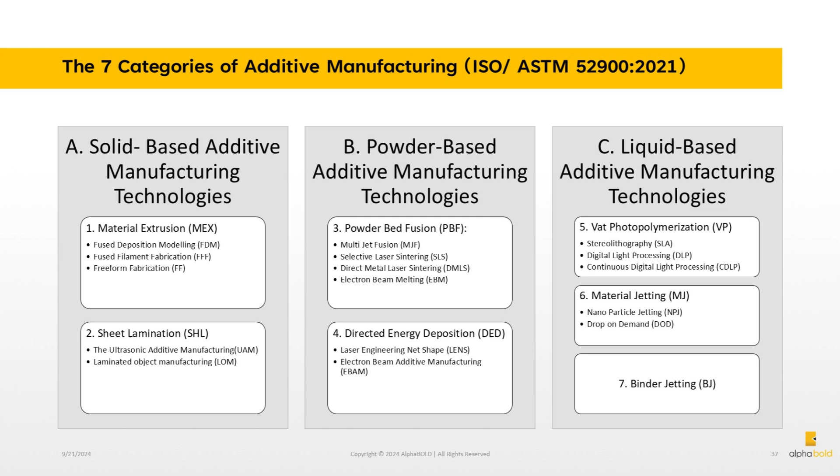5. Vat photopolymerization, VP: stereolithography (SLA), digital light processing (DLP), continuous digital light processing (CDLP). 6. Material jetting, MJ: nanoparticle jetting (NPJ), drop-on-demand (DOD). 7. Binder jetting, BJ.

Solid-based additive manufacturing technologies. 1. Material extrusion, MEX: fused deposition modeling (FDM), fused filament fabrication (FFF), freeform fabrication (FF).

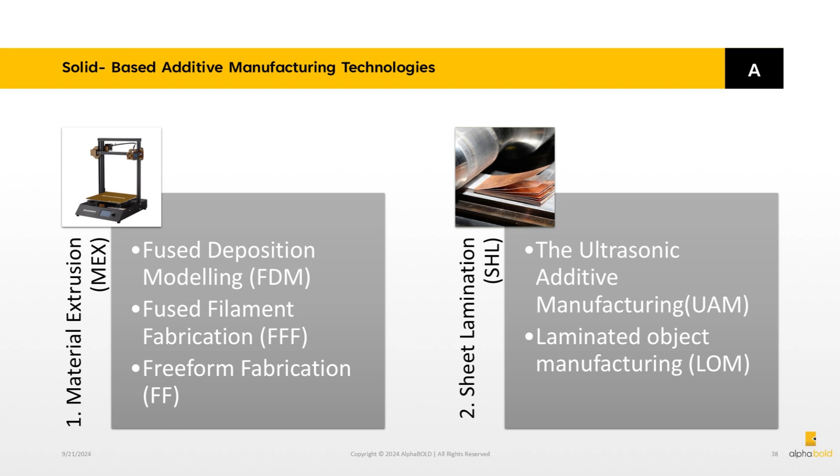2. Sheet lamination, SHL: ultrasonic additive manufacturing (UAM), laminated object manufacturing (LOM). Material extrusion, MEX.

Continuous flow: imagine a hot glue gun, but instead of flat lines, it builds intricate shapes layer by layer using a melted plastic filament. Precise deposition follows.

A heated nozzle carefully deposits molten material, creating each layer on top of the previous one. Dynamic movement: the nozzle moves horizontally, while the platform moves vertically, enabling complex 3D structures.

Accessibility: affordable and user-friendly, material extrusion is popular in hobbyist and even professional settings. Diverse materials: from common plastics like ABS and PLA to exotic options, a wide range of materials is available for

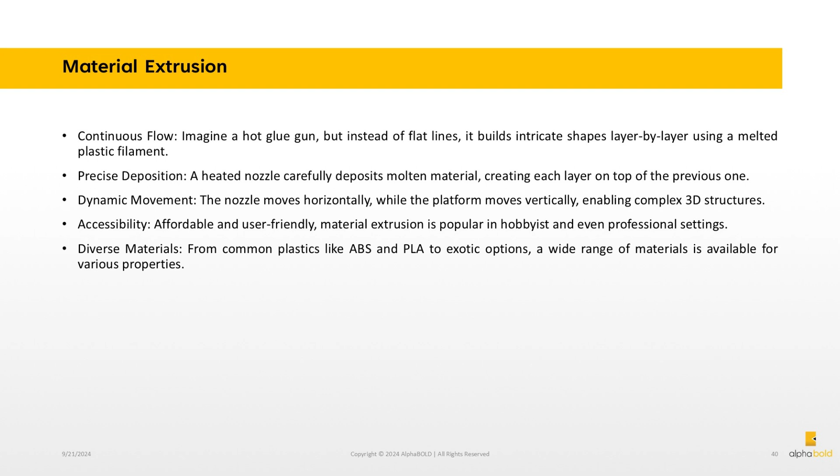various properties. Fused deposition modeling, FDM. FDM is a material extrusion process where material is heated and deposited layer by layer. It is commonly used in inexpensive 3D printers and requires controlling several factors for good quality.

Unlike other 3D printing processes, material is added continuously through a nozzle under constant pressure. Material layers can be bonded by temperature or chemical agents. Material is typically added in spool form.

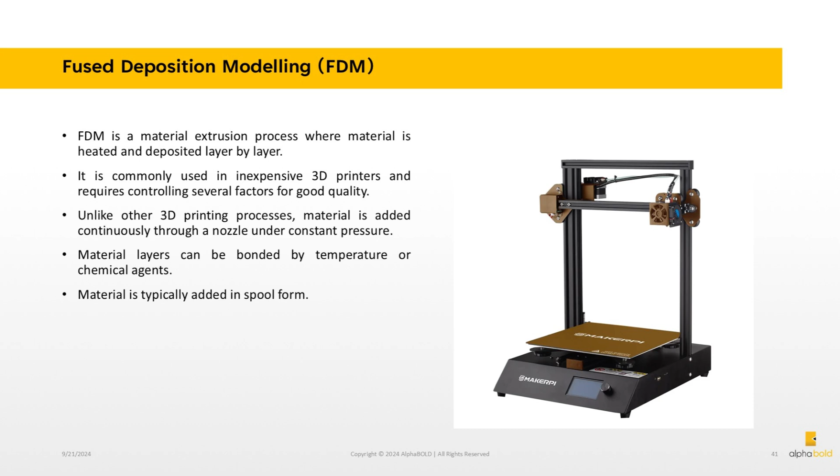Fused filament fabrication, FFF, also known as fused deposition modeling, FDM, is a popular 3D printing process using continuous thermoplastic filament. FFF printers melt filament in a heated extruder head, depositing layers to build the desired object under computer control.

Various materials like ABS, PLA, and nylon can be used for FFF printing, offering versatility in applications.

The process involves software processing of STL files, nozzle movement to deposit layers, and thermal control for proper material bonding. FFF printers typically feature a flat bed, gantry system, and stepper motors, with some using 3D printed components and polar

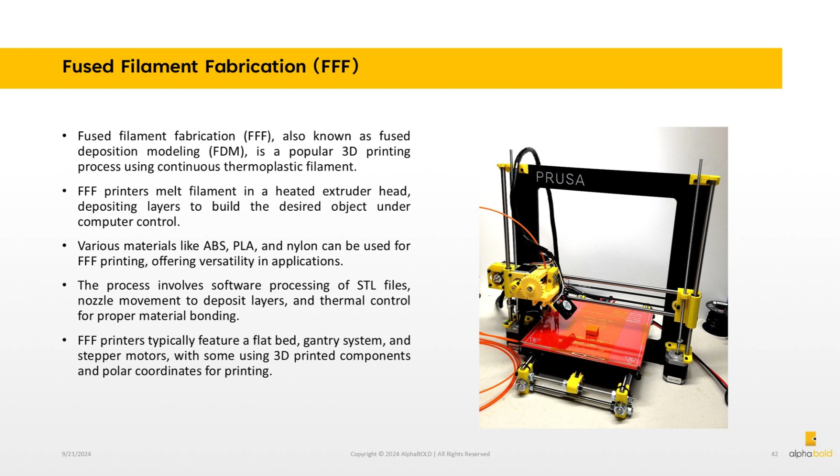coordinates for printing. Freeform fabrication, also known as solid freeform fabrication (SFF), encompasses various technologies that enable the direct creation of complex solid objects from computer models without the need for part-specific tooling or extensive human intervention.

It also goes by other names like rapid prototyping, rapid manufacturing, and solid freeform fabrication. The process allows for the creation of complex shapes and structures layer by layer. Unlike traditional manufacturing methods, FF does not require molds or tooling, offering greater design freedom and flexibility.

FF techniques include selective laser sintering (SLS), stereolithography (SLA), and digital light processing (DLP), among others. FF is used in various industries such as aerospace, automotive, healthcare, and consumer goods for prototyping, customization, and low-volume production.

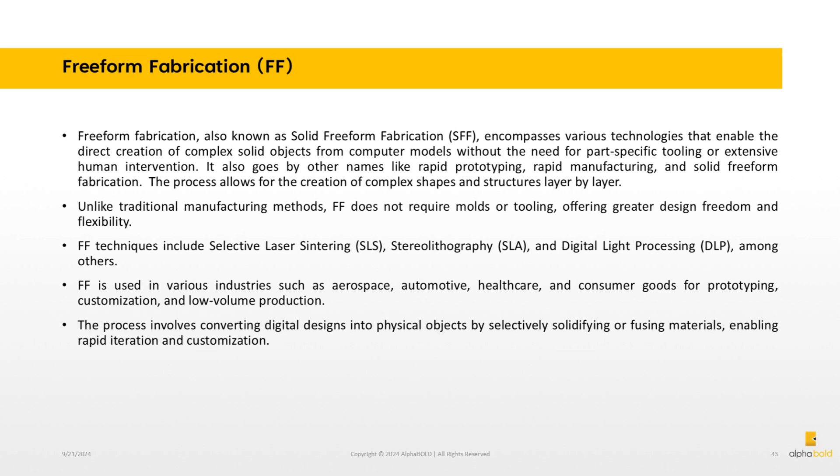The process involves converting digital designs into physical objects by selectively solidifying or fusing materials, enabling rapid iteration and customization.

Steps: material preparation. The filament, typically made of plastic, ABS, PLA, etc., is loaded onto a spool and fed into the printer. Extrusion: the filament is heated and softened within the extruder nozzle.

Deposition: the molten material is deposited onto the build platform, following a computer-generated path. Solidification: the extruded material cools and solidifies, bonding to the previous layer. Layer by layer: the process repeats, building the object layer by layer until completion.

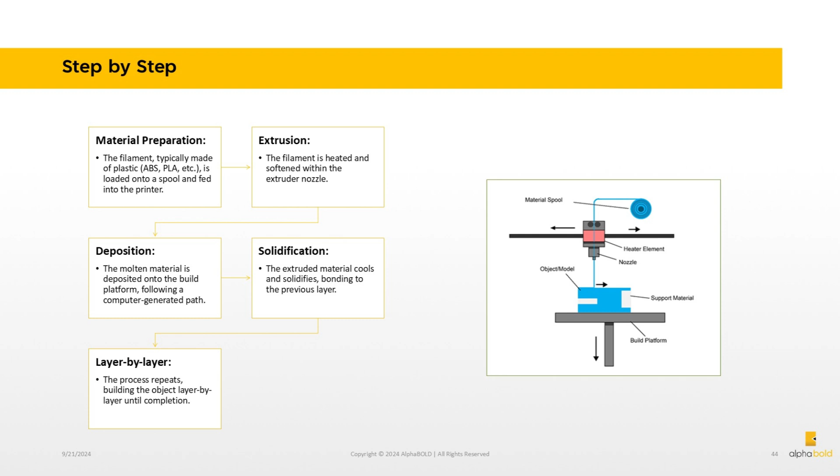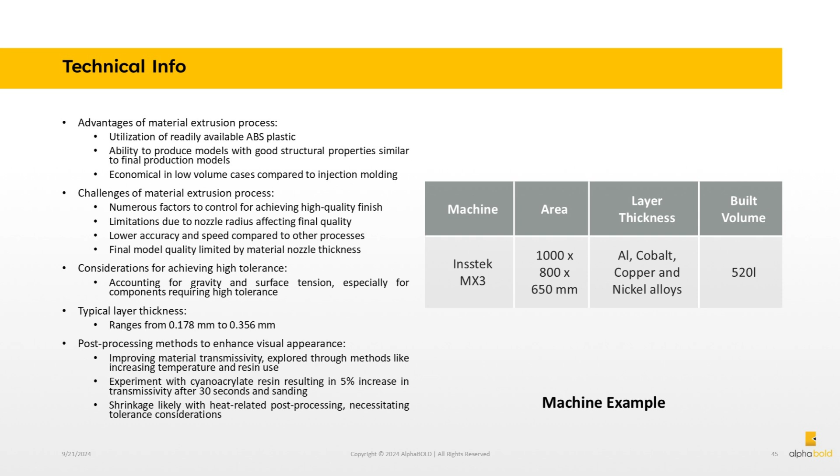Machine example: Insstek MX3. Build area 1000 by 800 by 650 mm. Layer thickness suitable for Al, cobalt, copper, and nickel alloys. Build volume 520 L.

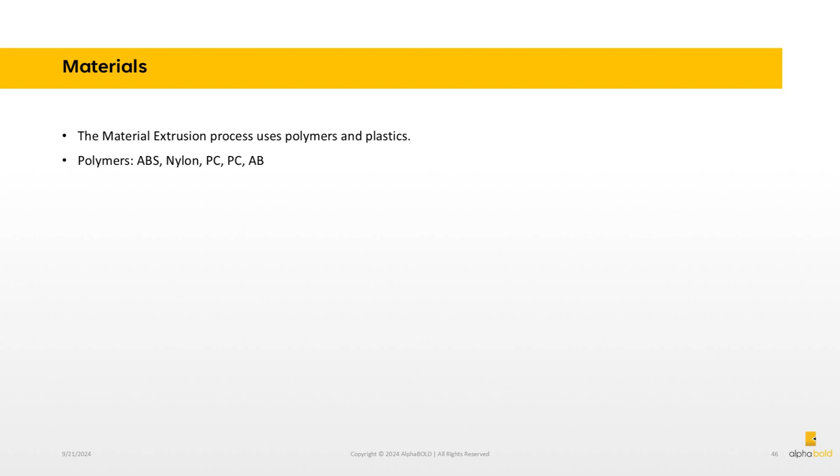Materials: the material extrusion process uses polymers and plastics, such as ABS, nylon, PC, and ABS blends.

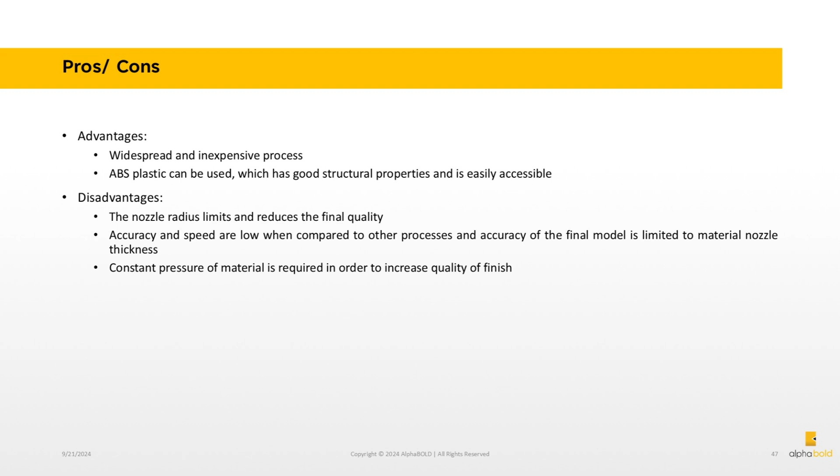Disadvantages: the nozzle radius limits and reduces the final quality. Accuracy and speed are low compared to other processes, and the accuracy of the final model is limited to material nozzle thickness. Constant pressure of material is required to increase quality of finish. Sheet lamination, SHL.

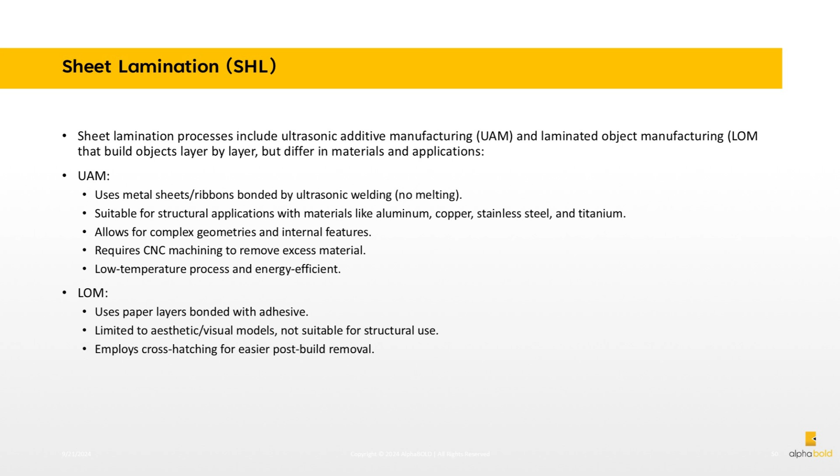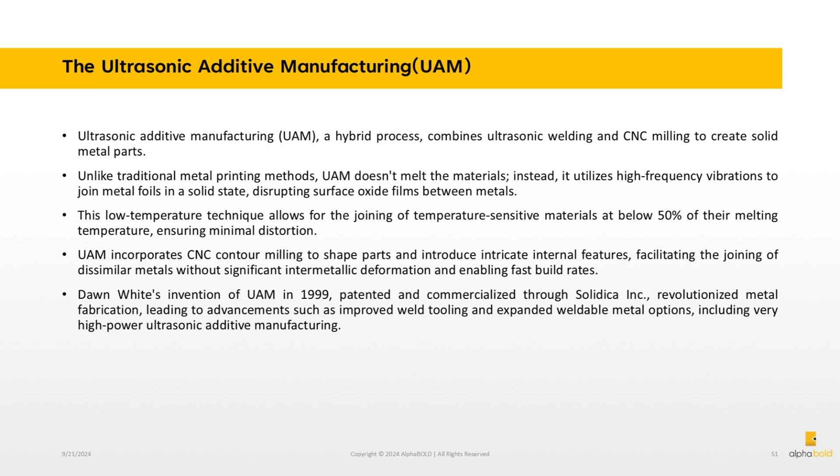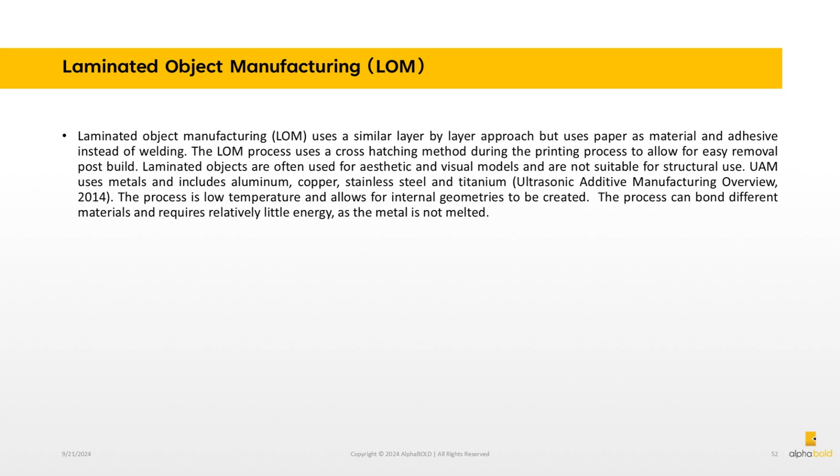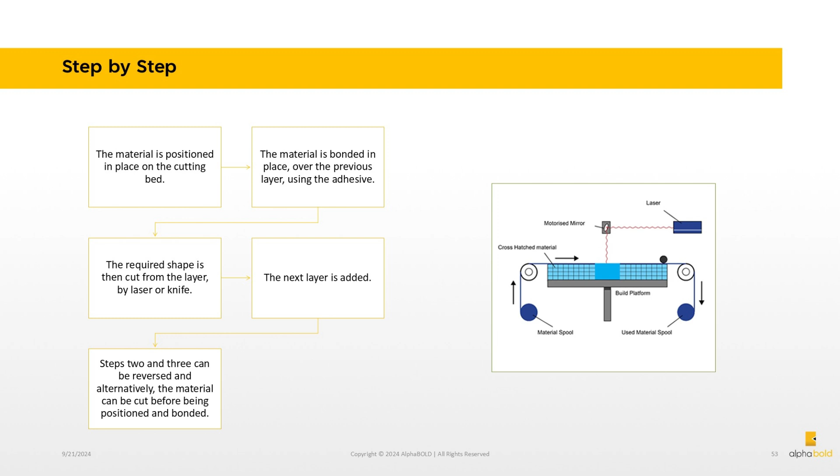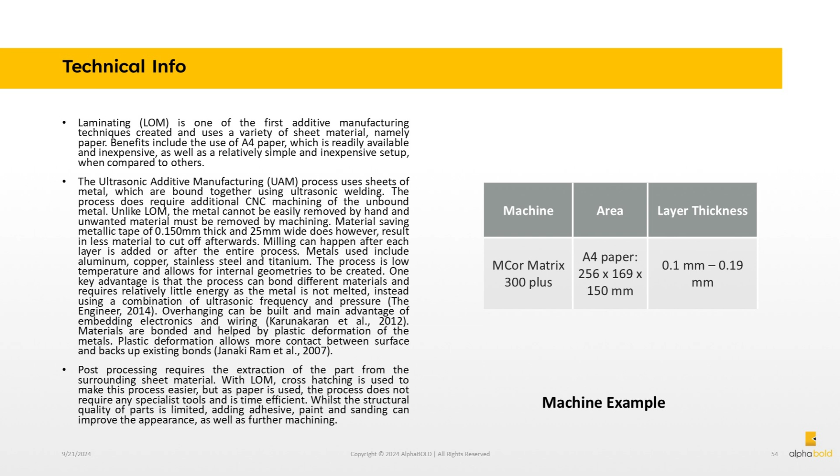Machine example: MCor Matrix 300+. Area: A4 paper, 256 by 169 by 150 millimeters. Layer thickness: 0.1 millimeters to 0.19 millimeters. Materials: effectively any sheet material capable of being rolled.

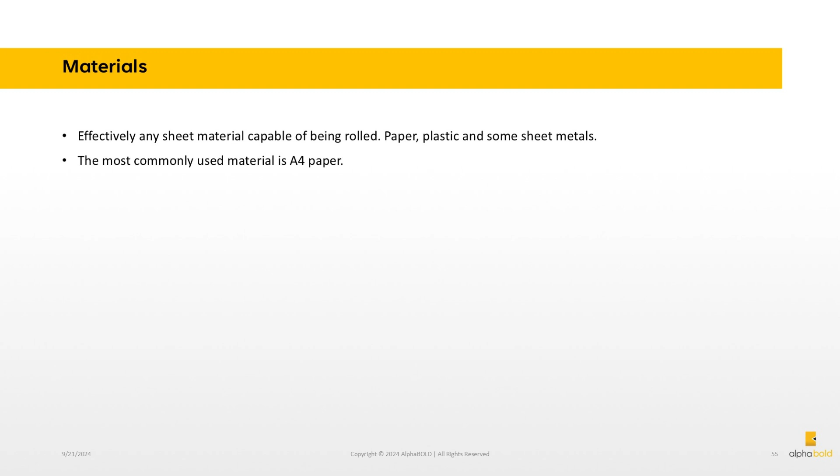Paper, plastic, and some sheet metals can be used, though the most commonly used material is A4 paper. Advantages include speed, low cost, and ease of material handling, but the strength and integrity of models is reliant on the adhesive used. Krar and Gill, 2003.

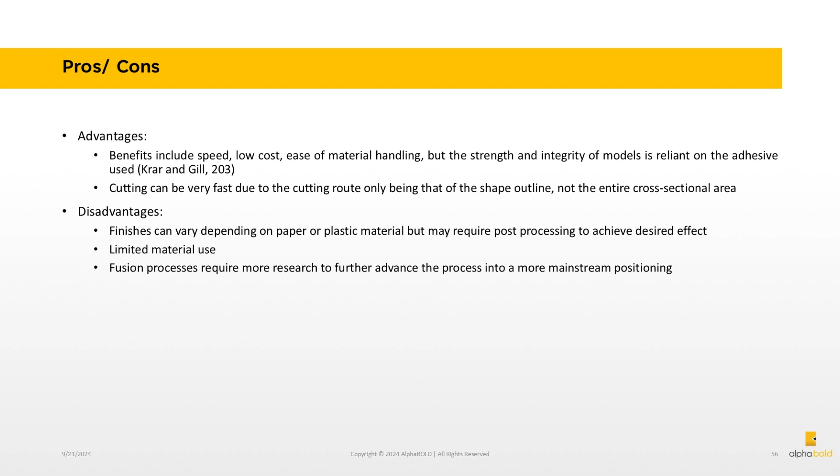Cutting can be very fast due to the cutting route only being that of the shape outline, not the entire cross-sectional area. Disadvantages: finishes can vary depending on paper or plastic material, and may require post-processing to achieve desired effect. Limited material use means fusion processes require more research to further advance the process into a more mainstream positioning.